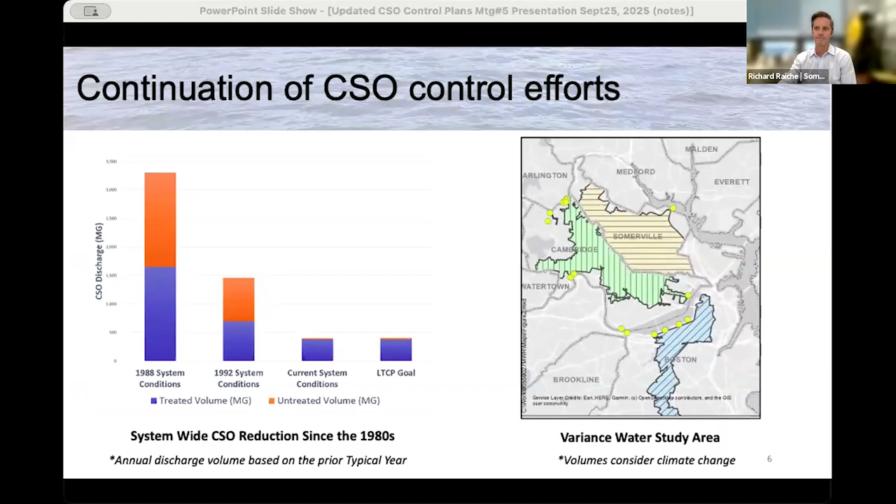For anyone who doesn't know what a CSO is: in most modern systems, there are two sets of pipes in the street, one for stormwater and one for sanitary, that are separate. In Cambridge, Somerville, and parts of Boston, and other municipalities outside the MWRA service zone like Haverhill and Fall River, we have an older system that is combined under dry weather conditions or small rainstorms. It works great because it sends all the sanitary flow plus some dirty stormwater to Deer Island for treatment. But when it rains heavily, like it does right now, that system gets overwhelmed, and there are relief points in the system that spill that combined sewage to the nearby waterways.

Now, that is as gross as it sounds, and certainly CSOs are a large source of pollution in those receiving water bodies, but they are not the only source. There's pollution that comes from dry weather, from inappropriate interconnections, from wildlife, and a lot of pollution from separated stormwater, including bacteria, oils and grease, and nutrients. It's important to understand there are a lot of negative impacts from all that pollution - water quality, environmental health, and primarily public health. But it's important to remember that eliminating the CSOs alone does not by itself result in swimmable and fishable water bodies. Those other sources of pollution are still a concern to the region.

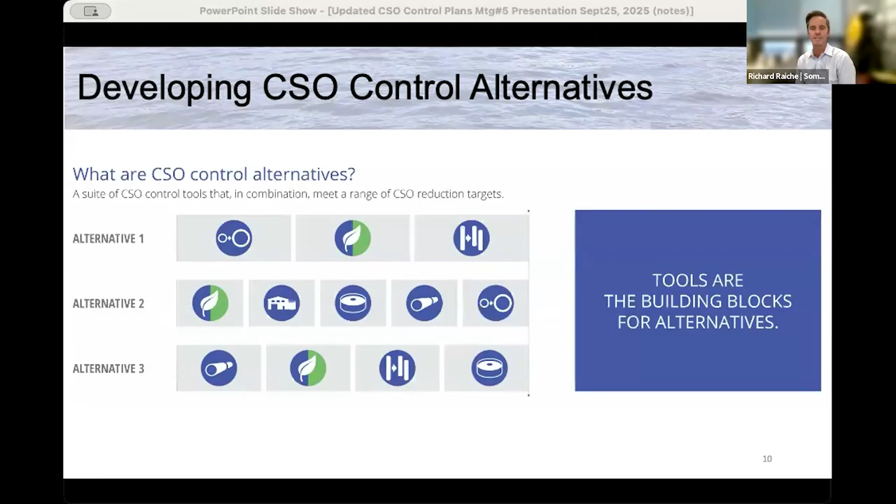Now, we take those tools and combine them. Certainly some alternatives for solving CSOs could entirely be one of those tools, but it's much more efficient to combine them. Each one has its own pluses and minuses in terms of effectiveness. So what the technical team has been doing for the past years and months is stitching those tools together in creative ways to create an alternative that is a holistic way of addressing the CSOs.

Next, we'll step into our process to select the alternatives. Later in the meeting, as Abby outlined, we're going to introduce you to those alternatives—there are 37 of them, so buckle up. But first, we're going to discuss our process for how to select a preferred alternative.

A preferred alternative is the one that will be selected by those project partners—the cities of Somerville and Cambridge, as well as MWRA—for advancement into the draft CSO long-term control plan. At the tail end of the presentation, we'll describe exactly what that is and what the future process is.

There will be one preferred alternative per receiving water body. So the Alewife, Charles, and Mystic will each have a preferred alternative, which is a combined set of tools, a suite of projects.

Now we're analyzing all of these alternatives against future conditions. The previous plan looked backward, and frankly, to our knowledge, every CSO plan in the nation has always looked backwards to evaluate those alternatives—looking through historical rainfall data and putting together what is known as a typical year that has a range of storms, a number of storms, a total amount of precipitation, storms of different sizes that reflect what typically happens.

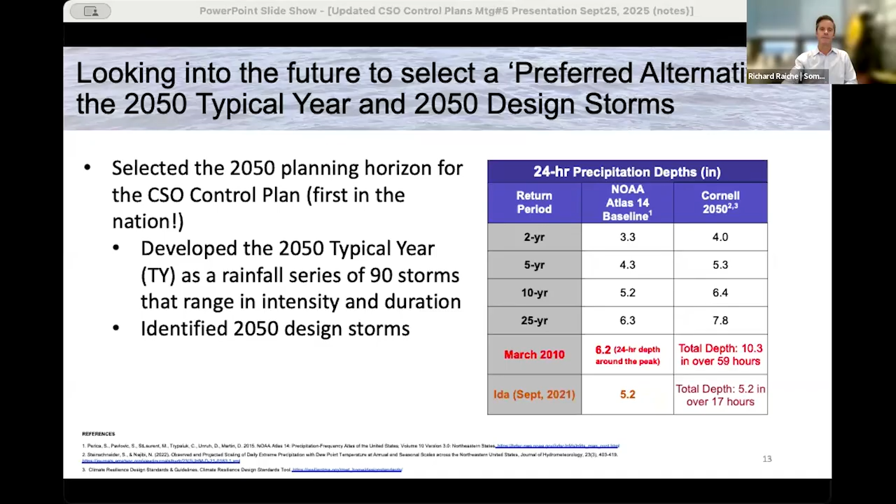We're also evaluating it for larger storms that happen less frequently but with higher intensity. You can see in the table here just how large those storms can get, and also some storms that people remember, just to give you context for what type of storms we're evaluating. So it's good to think about those storms in that context.

On the next slide, this is a result from our hydraulic model. Our hydraulic model is the tool we use to analyze both current system performance and alternatives. All these red dots you see are manholes in our hydraulic model where, essentially, the hydraulic grade line comes up to the surface or very close to it, under a 25-year storm. And when I say a 25-year storm, that's a storm that statistically happens once every 25 years, or in any given year has a 4% chance of actually occurring.

All of these nodes are essentially a system in failure. These are very large storms that cause a lot of problems. Clearly, there are CSO events in the future, but also really difficult storms for our operations people to manage—this is sanitary overflows into the street and backups into people's houses anywhere you see those red dots.

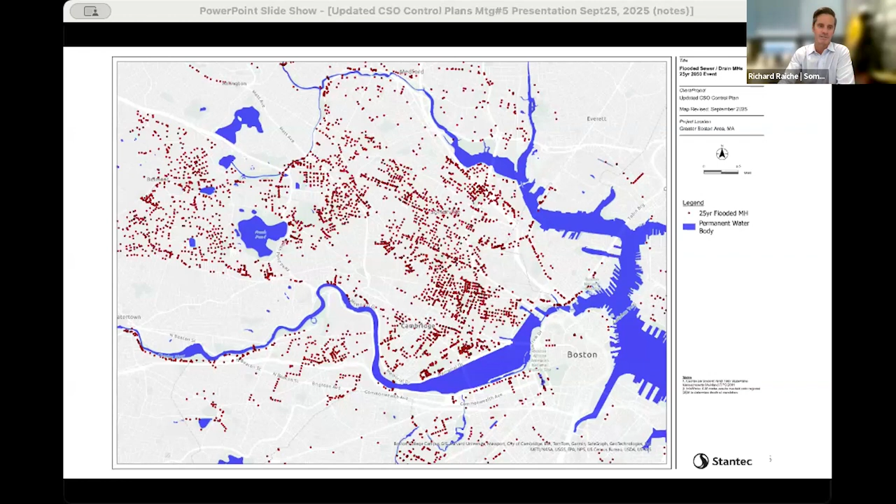Flipping back to the base map, just to orient yourself again—in addition to that system capacity problem where we have sanitary sewer overflows in the streets and in people's houses, we also obviously have localized street flooding. Under dry weather conditions we have none, but flip to the next slide and you can see just how much street flooding we have.

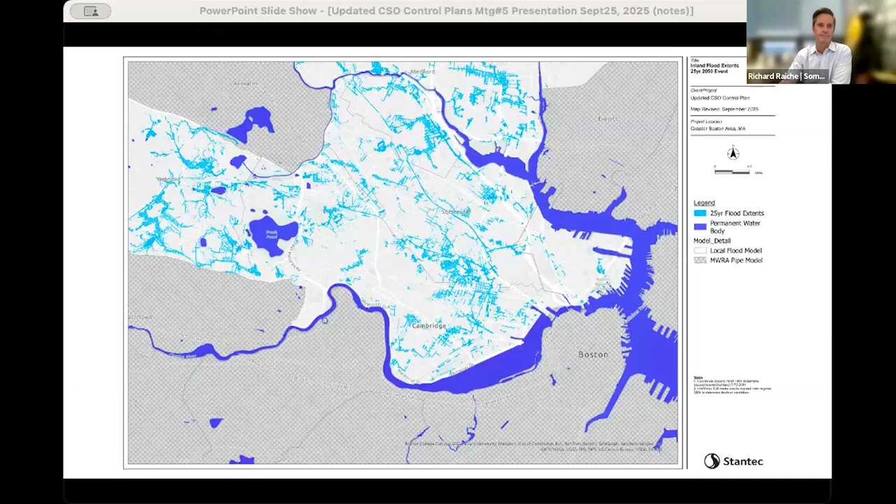And again, what we're able to use here are the hydraulic models of Cambridge, Somerville, and Medford. The grayed out areas we just don't have information on, but they certainly also have street flooding. This gives you an impression of, under that large 25-year storm, just how much street flooding we'll also be dealing with. And then one final flip back to the base map, just to see normal conditions.

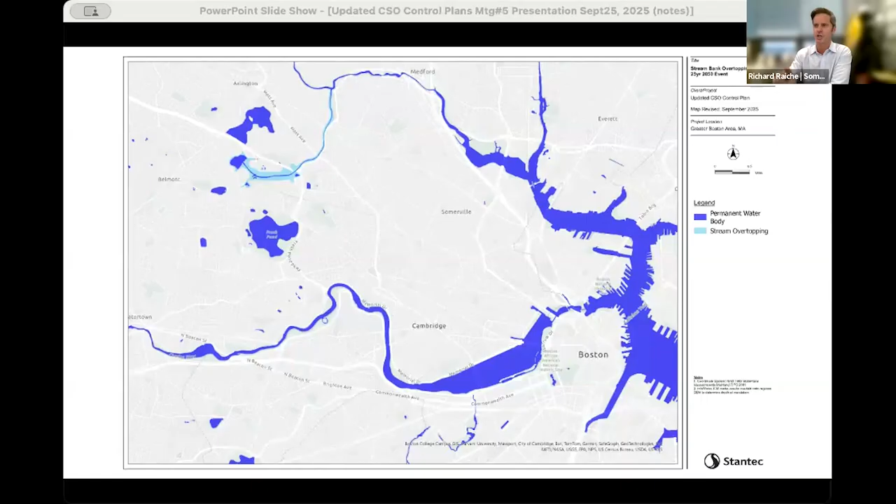And then looking at the streams themselves, a different hydraulic model shows us bank overtopping. On this one, you can see in the lighter blue, particularly around the Alewife, how much basically river flooding we have, bank overtopping. If we can just toggle back and forth for a second so that blue pops out a little more... or we'll move on. There you go, sorry about that.

We should have had the flashing lights warning at the top of this broadcast. So that's just to give you a flavor that those large rainstorms do a lot in our urban environment. Certainly Cambridge and Somerville and Boston aren't alone - everywhere faces these kinds of challenges when we have storms of that magnitude. But I just wanted to put in perspective what happens on our civil systems under that rain event.

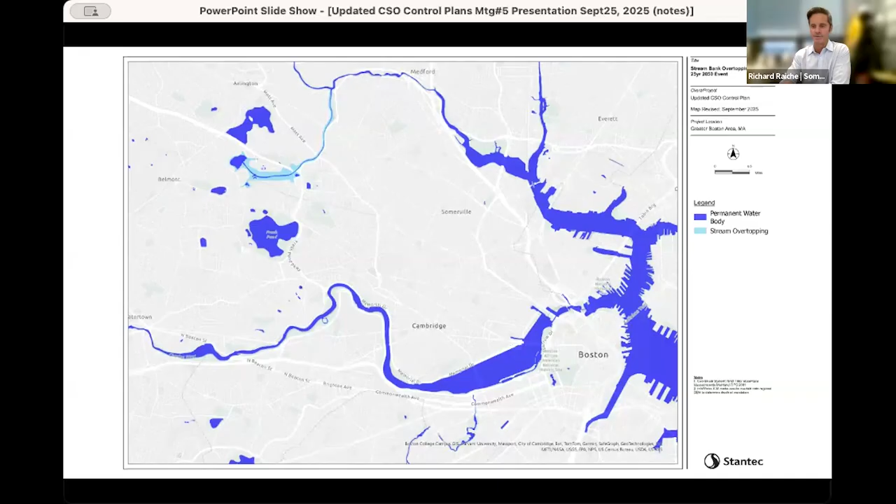So now we'll move into our preferred alternative selection considerations. We've had a couple of community meetings, a couple of workshops, and we've identified a number of considerations for criteria, and we'll step through some of these. The first is the level of CSO control, and I'll turn it over to Brian from the MWRA to describe what level of control is.

Thanks, Rich. So, I'm Brian Kubaska, chief engineer at the MWRA. I also wanted to point out that several of MWRA's senior leadership team is here tonight. They wanted to make sure they heard comments, heard all the information, and are very engaged in this important process we're going through here. If you jump to the next slide.

So we've developed what we're calling 4 levels of control, which are being evaluated as part of this process. Using our detailed hydraulic computer model of the wastewater collection system, which includes all the sanitary pipes of Cambridge and Somerville, and the pump stations and pipes of the MWRA, we're able to predict the number of activations and total volume of CSO that we'd expect in these 2050 storms that Rich mentioned earlier.

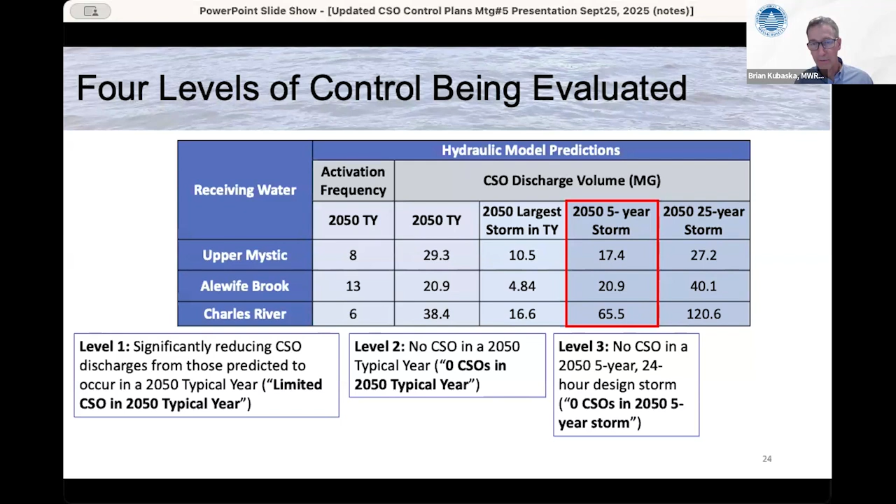The red boxed volumes are what is required to be captured. So for example, 65.5 million gallons in the Charles captured to achieve that level of control, a 5-year level of control. And lastly, the greatest level of control evaluated would result in no CSOs in a 2050 25-year design storm.

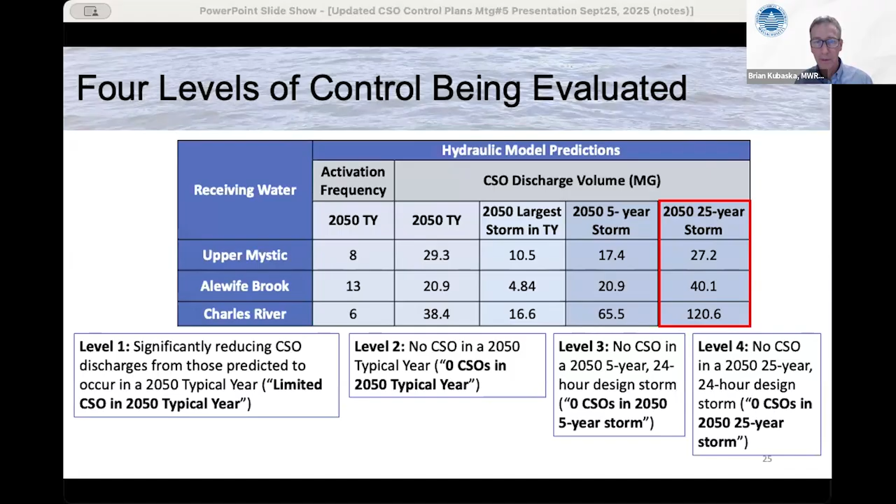This infrequent event, as Rich mentioned, has a 4% chance of happening out in that 2050 planning horizon. Very large CSO volume to capture, resulting in very large and complex projects. In comparison with the largest storm in the typical year, that light blue column that I mentioned in the center, the Alewife and Charles are predicted to have like 7 to 8 times greater CSO volume to contend with. So a lot more volume to deal with in these very large storms.

So I'll turn it back over to Rich to talk about some additional considerations in our alternative selection.

Another one to think about is the timeline to implementation to get to CSO benefits. Again, these alternatives are stitching together large numbers of projects, large numbers of complex projects. And some of the alternatives get to CSO reduction faster than others.

So that's a consideration. The impact on priority vulnerable and environmental justice populations. This is a state requirement, acknowledging particularly that prior actions in the state sort of ignored the populations without agency, and that it is incumbent upon all of us to consider that in these types of planning endeavors.

Then there's permitting uncertainty and site acquisition risks. We didn't take any alternatives off the table because we thought that they were going to be difficult to do, either difficult to permit, in terms of new outfalls to the rivers, in terms of doing work in DCR land, crossing mass highway rights of way. We didn't eliminate anything, but we did want to identify that some projects have more uncertainty or risk than others. So that would become a criteria by which we evaluate them.

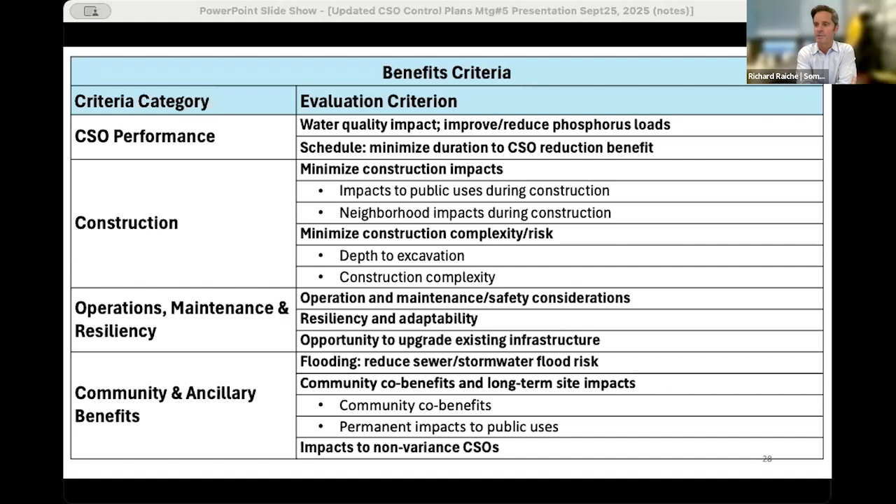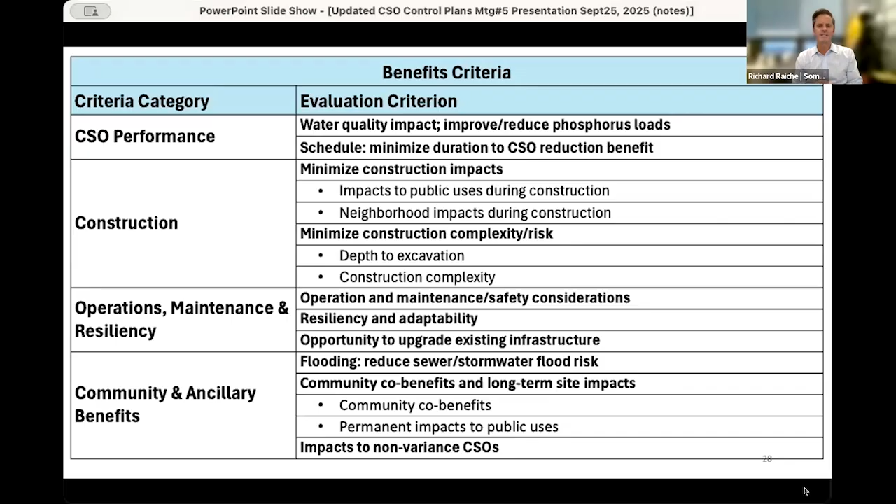And then finally, community and ancillary benefits: reducing flooding, co-benefits particularly from green stormwater infrastructure, permanent impacts to public uses, and one final one is the impacts from non-variance water CSOs. So we've got a range of these. A lot of these are more technical ones that we can evaluate. And then finally, stakeholder impact.

And for that, I will hand it back over to Abby to reflect back what we've been hearing from all of you interested stakeholders who have been attending these meetings and working with us in workshops.

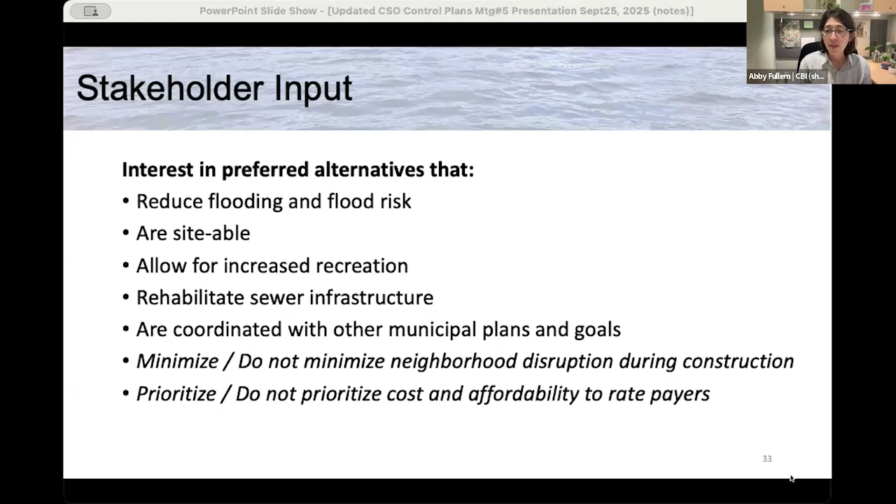So there's a lot of input that we've gotten from the public, from other city councils, boards, advisory boards, and organizations, and we really appreciate all of that. This is one of the considerations that the project team is using to select the preferred alternatives.

Now we want to share these 37 preferred alternatives with you. Lucica Hiller from the city of Cambridge is going to do a little orientation on how we're going to talk about these, and then she's going to jump right in. Thank you, everyone, and welcome. My name is Lucica Hiller.

I'm the Senior Project Manager for the CSO Control Program with the City of Cambridge. I'm joined today by Jim Wilcox, the City Engineer, and Diane Stokes, the Director of Engineering Services. Like Abby said, we took all this feedback, and using our unified computer model and future precipitation data, we modeled hundreds of scenarios to understand what is possible in terms of reducing and eliminating CSOs, which tools work better and where, and what is possible to engineer and build.

While we did that, we came to some key technical decisions. Through our modeling, we found that full sewer separation will not eliminate sewage going into the rivers, and we will still have sanitary sewer overflows in some areas during large storm events. You saw the map that Rich shared with the red dots.

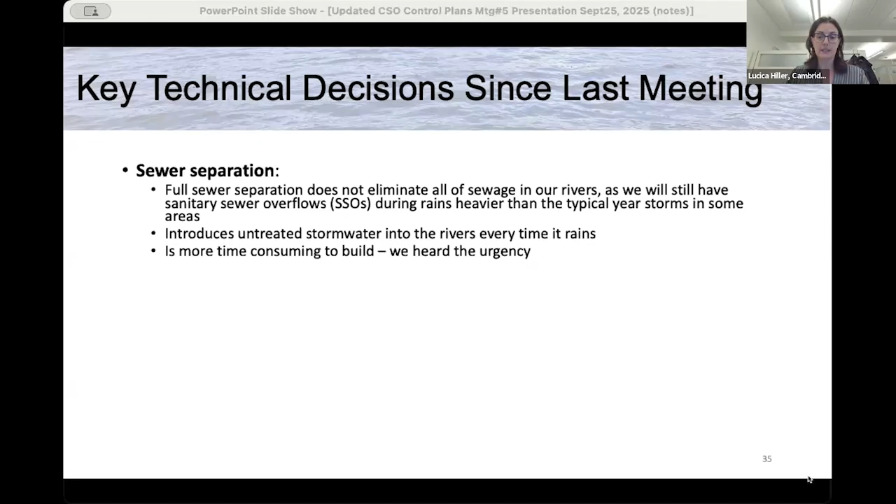Additionally, with sewer separation, we're introducing more stormwater. That is a problem both in terms of the pollutants in the stormwater, but also the quantity we will be introducing into small brooks such as the Alewife. Sewer separation is also time-consuming, so we've heard the urgency to build faster. For all these reasons, you will see that we are including sewer separation in some of our alternatives, but not as extensive as full sewer separation.

CSO treatment is another tool we have, but that just reduces and eliminates the bacteria from a CSO discharge, not the actual CSO discharge volume. So this was removed as a viable option for this plan because treatment requires both an underground storage tank and an above-ground large building—think something like Cottage Farm or the Somerville Marginal Facility, where chemicals such as chlorine are stored and used. Storage tanks, like combined sewer overflow storage tanks without treatment, can help us reduce CSO volumes without the need for trucking, chemicals, and additional buildings for our O&M needs.

Green stormwater infrastructure is not an effective tool for CSO control, as it cannot by itself capture the immense amount of stormwater we need to see CSO reduction for these future climate conditions.

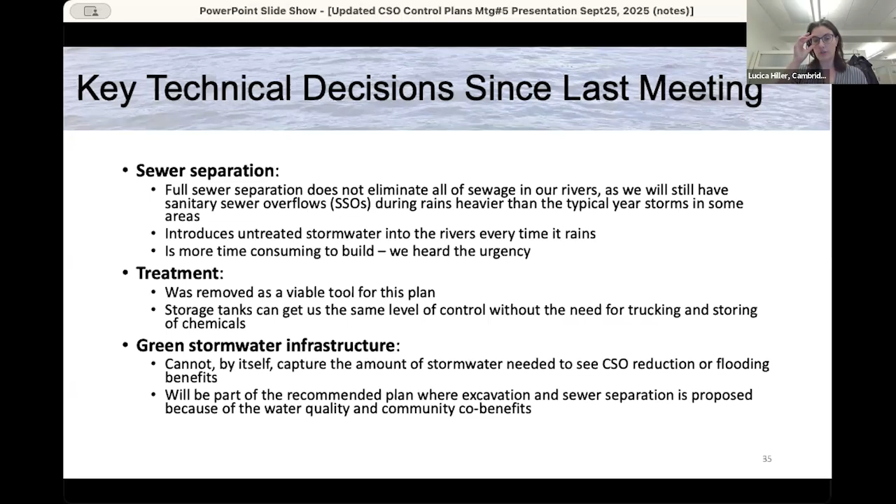Our alternatives include GSI more at a regional scale to see if that has an impact in helping us with the gray infrastructure needs. We want to reiterate our commitment to include GSI for projects that include excavation or sewer separation, because we know the co-benefits for the community and how important stormwater treatment is.

Okay, with that in mind, somebody already mentioned we came up with 37 alternatives that we are considering for the draft report plan. They span the 4 different levels of CSO control that Brian mentioned, and our 3 water bodies. They range from limited CSOs in the 2050 typical year to no CSOs in that large future 25-year storm.

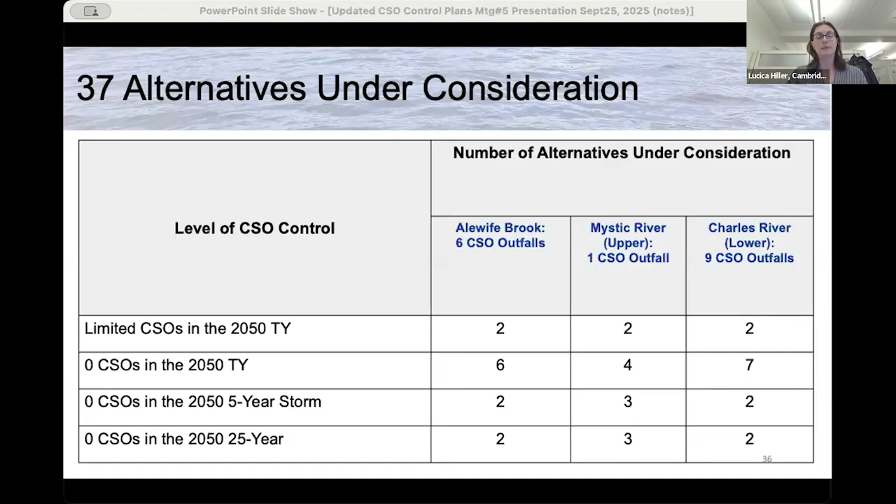In the next slides, we will go into some detail about the 37 alternatives. We will go pretty fast and highlight major components and differences between them. This information and additional details for the sub-projects is actually available right now on our joint website. I'm going to ask Abby or Charlotte to put it again in the chat. We hope that you will go there and look through more. This is what you will see in the draft report, and we will present additional detail and information there.

Okay, we'll start with the 12 alternatives that we've developed for the Alewife Brook. This is a summary table that shows the 12 alternatives. They're arranged by level of control in each column, with a naming convention—for example, 1AB, 2AB, 11AB, AB standing for Alewife Brook. You will see for the Mystic and the Charles, a different letter combination.

In the first column, for 0 CSOs in the 2050 typical year, we looked at projects for each outfall. So you'll see groupings of smaller projects and a variety of approaches, going from storage—like tanks and tunnels—and then also separation and micro tunnels. These all make up these alternatives.

For some of these projects, we found that having limited CSOs—the second column—at certain outfalls may greatly benefit the implementation burden, the cost, and timeline for these projects. Then when we go to these larger storms, the 5-year and the 25-year storms, the third and fourth columns, we found out that we need regional approaches for that much water. These levels of control are focused on storage, as we have stated in past meetings.

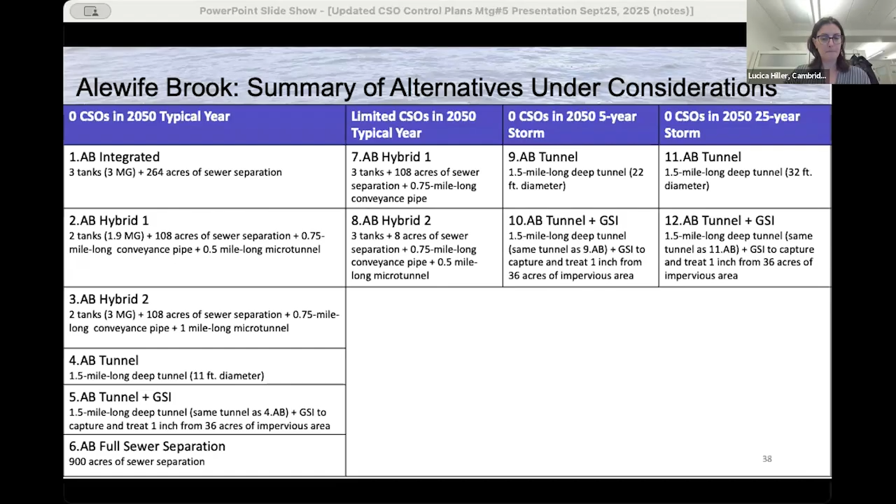Okay, so to orient people, all our alternative slides will look like this. They're very similar. What you see here is a map of the tributary area in the Alewife Brook, and in the purple triangles, you see where the CSO outfalls are, or regulators. The purple diamond rhombus at the top of this screen represents the Alewife Brook pump station, but in other project sheets, they represent relevant facilities in our region.

For this project, Project 1 AB integrated, we are proposing 3 combined sewer overflow tanks shown here in these yellow dots, about 264 acres of sewer separation shown in this blue polygon, and a large storm drain shown here in that blue line along Mass Ave. This project will require land acquisition somewhere in the blue polygon to slow down stormwater before it can be released into the Alewife Brook. GSI is not explicitly shown here or in any of these alternative sheets, but it is included as part of sewer separation and other excavation work.

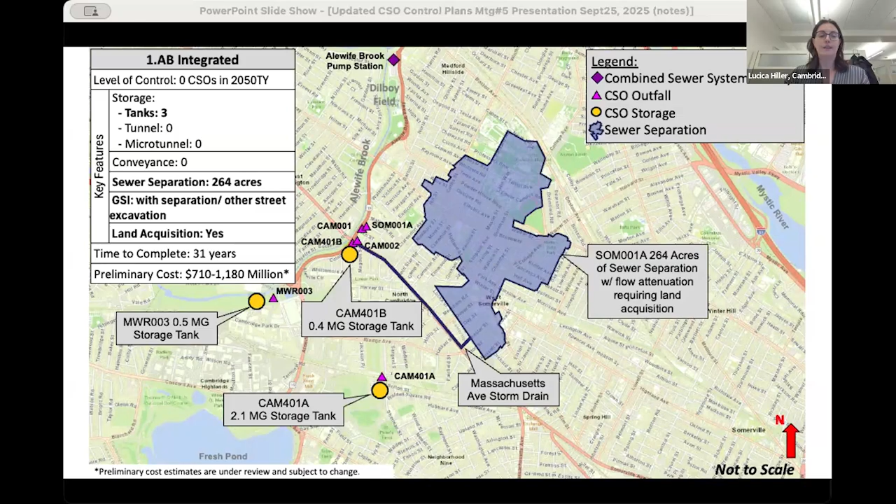The second alternative is a hybrid of the first. This one changes a little bit. We could get to the same level of CSO control, 0 CSOs in the 2050 typical year, but we could do it faster, in 20 years, and also cheaper, for $350 to $580 million, by doing 2 CSO tanks, less sewer separation, about 100 acres, and including a half-mile long micro tunnel shown here in this green line.

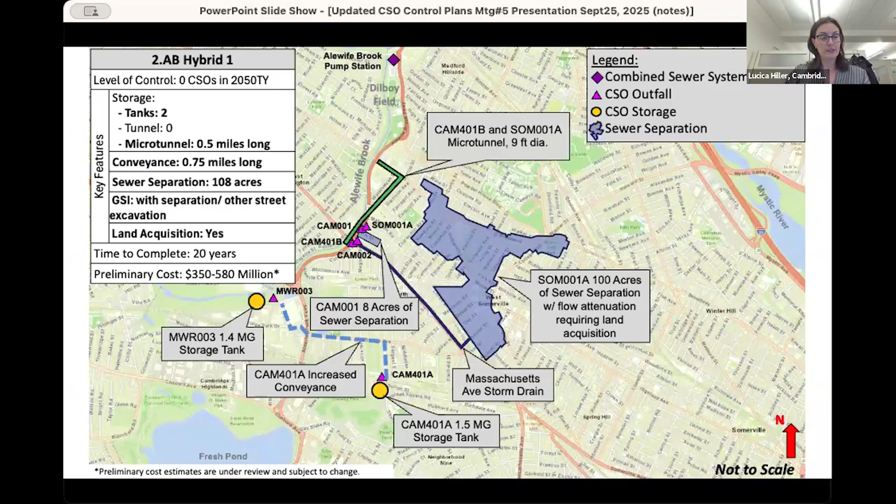The third alternative for the Alewife Brook makes additional improvements in terms of timeline to get to the same level of CSO control. We estimate about 15 years. It's cheaper again, somewhere between 200 and 340 million, and still has 2 large CSO tanks, but it has very little sewer separation and instead a 1-mile long micro tunnel.

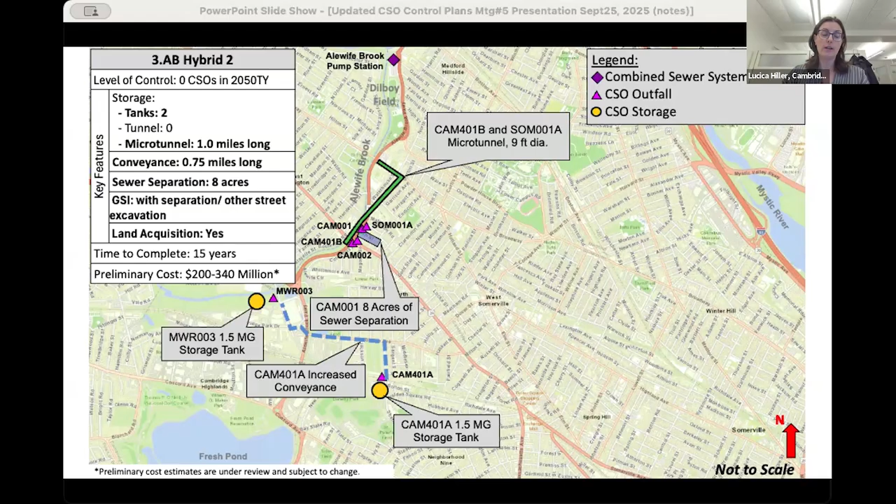Alternative 4 is a regional approach that includes a 1.5 mile tunnel, 11-foot diameter. Imagine two people standing over each other - this is how big this tunnel will be. This will take about 15-20 years to complete and cost between $440 and $740 million. There's also additional pipes that will need to be increased, seen here in this dashed blue line, and the tunnel alignment is shown here in red, and the small orange dots represent the tunnel drop shafts.

Alternative 5 is the exact same as alternative 4 with the tunnel, but includes GSI here, and you can see the inclusion of large-scale GSI. The tunnel size doesn't change - we still need just as big of a tunnel to get there.

Alternative 6 is what we looked at for sewer separation in this area. To get to 0 CSOs in the 2050 typical year, Cambridge and Somerville will need to separate about 900 acres. We estimate this to take more than 50 years and cost somewhere between $1 or $2 billion, as we need to consider significant land acquisition for storage, treating, and stormwater.

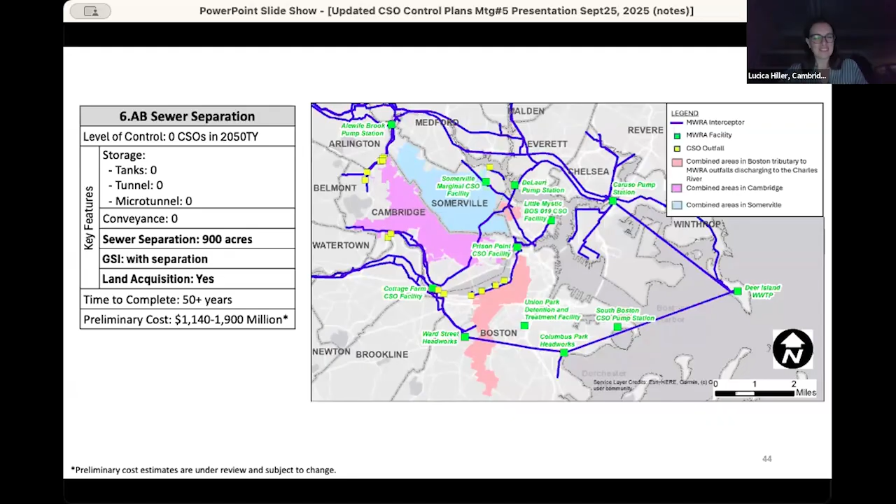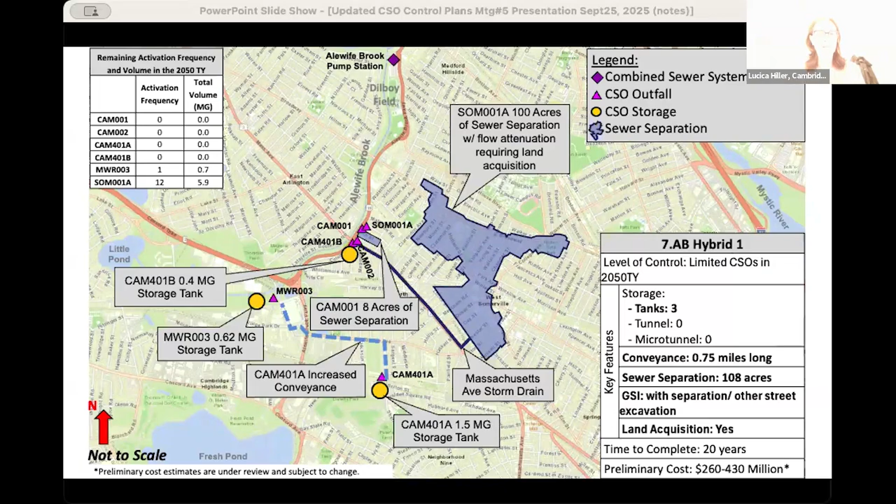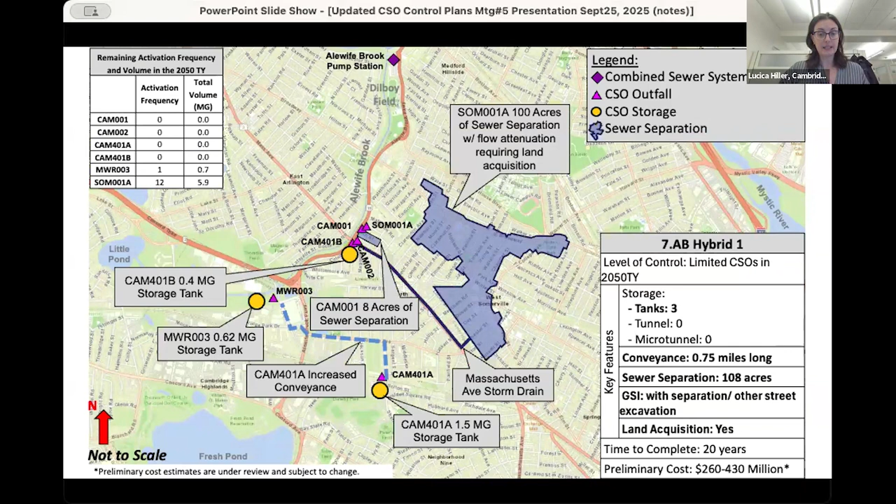This is still going to take 20 years, and you see the cost here.

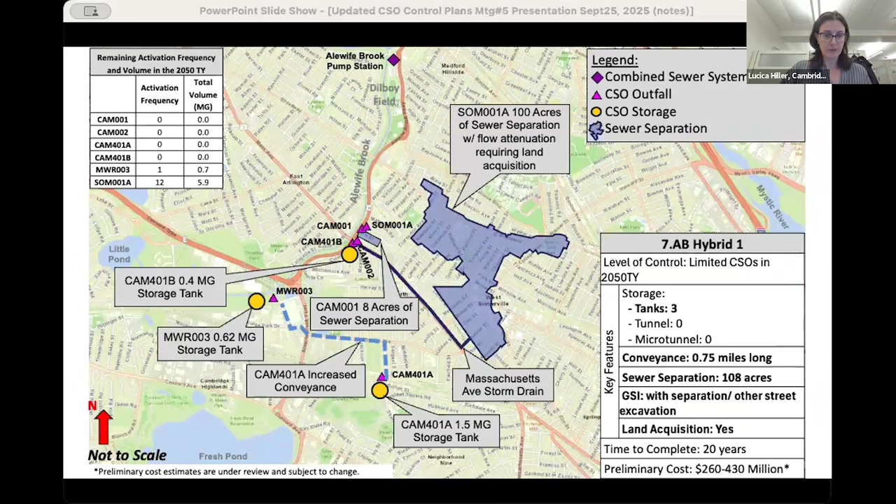Alternative 8 is a hybrid of what I showed you previously, and this one includes a 0.5 mile long microtunnel instead of Somerville sewer separation. This can get us down to 4 activations and 3.8 million gallons of discharge in the 2050 typical year for about $200 million, and it will take somewhere between 10 and 20 years.

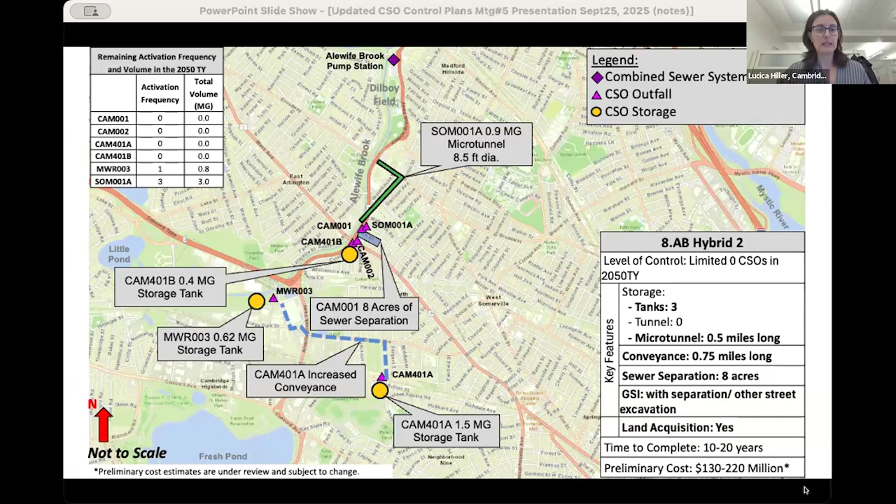Okay, alternative 9. Now we're going into the large, 5-year storm level of control. To get to that level of control, 0 CSOs in the 2050 typical year, we are proposing a large diameter tunnel. It's similarly long, 1.5 miles, but it's a 22-foot diameter as opposed to the 11-foot diameter - about 3.5 people. For this tunnel, we will also need an odor control facility and a dewatering pump station. This will take about 12 to 15 years and cost about $1 billion.

Moving on, alternative 10. This is the same tunnel as before, but includes GSI, and as you can see, the size of the tunnel stays the same. So GSI definitely has co-benefits, but it's not helping us reduce the size of our tunnels.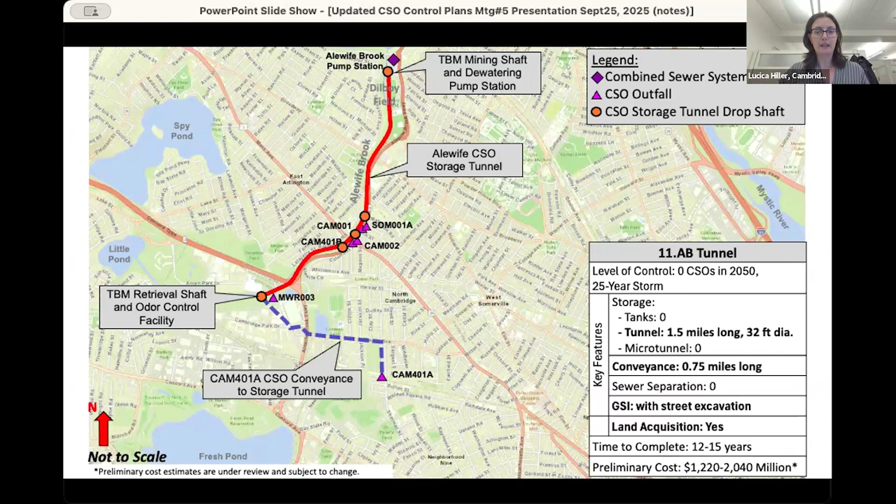Alternative 10 is the tunnel proposed for the largest level of control we're considering, with 0 CSOs in the 25-year storm. That's Alternative 11, right? Just want to make sure we're on the same page. Yes, 11, thank you.

Alternative 11 has a 1.5 mile long tunnel, and you can see the diameter is 10 foot larger, or thicker, than before. We estimate the same construction duration as for the 5-year storm tunnel, but the cost here almost doubles.

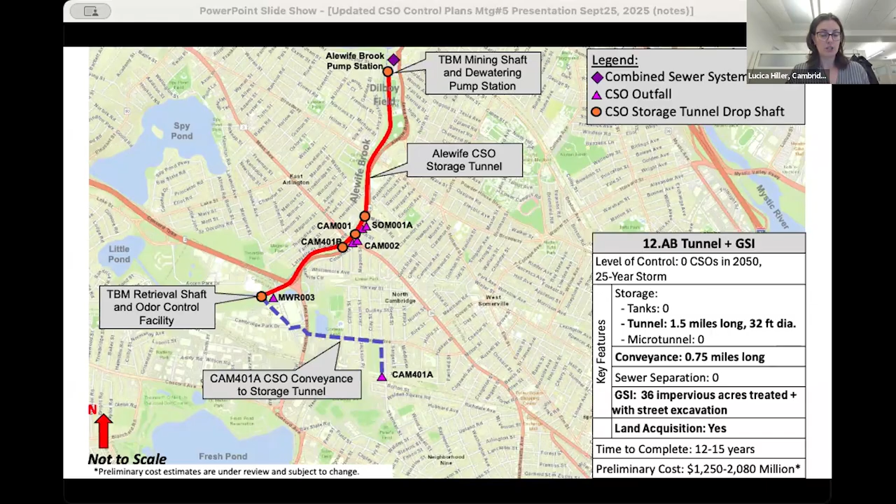Lastly, the last alternative we're considering for the Alewife Brook is the large tunnel and GSI for the 25-year level of control. You can see the costs and implementation time are similar, and the tunnel needs to be just as large.

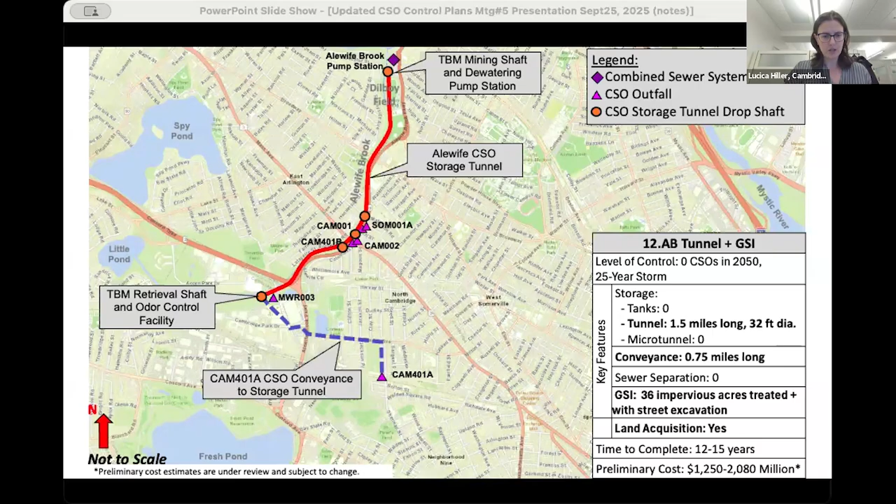I'm going really fast through these, so please ask us questions as we move into the Q&A session. I'm going to pass it on to Rich to talk about the other alternatives in the Mystic River.

Thanks, Lucica. We look over at the Mystic. The approach is the same as in the Alewife, so we've got alternatives for the different levels of control, each one an elaboration on the previous ones as we step through the numerical alternatives. We can jump right in.

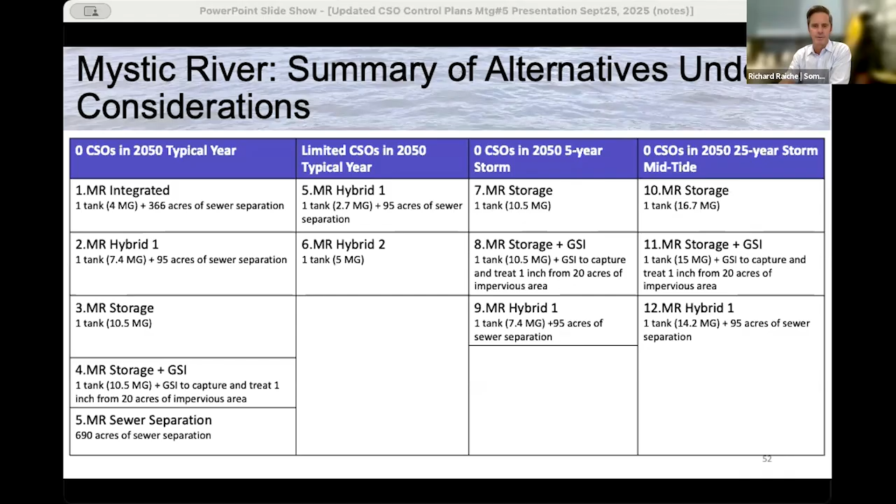The approach is the same as what Lucica outlined, so I might go a little faster. For the typical year we analyzed, the starting point was a good deal of sewer separation in the Winter Hill area, plus a storage tank for CSO flows down in the Assembly area. We're targeting the parking lot area in front of Staples at the moment, which will be a development parcel for Assembly, but that's the current target.

On these slides, while we're counting this as a one-tank alternative, that's because it's one CSO combined flow tank directly reducing CSO flow. The sewer separation in Winter Hill does require construction of in-system stormwater storage tanks. We have limitations on how big we can build those new stormwater pipes in already congested, narrow roads, so there's a hydraulic capacity issue with sewer separation. To avoid extensive flooding on day one, the first time the new stormwater system sees a decent-sized rainfall, we have to have tanks in the system.

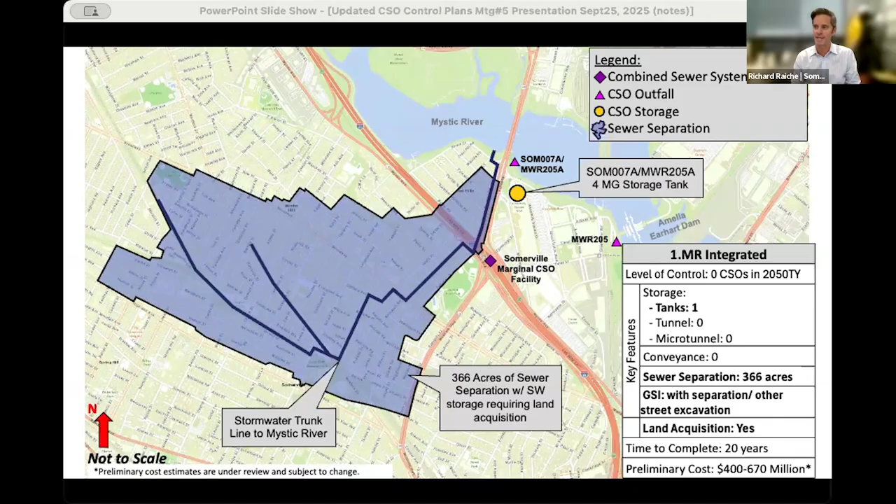Moving on to the second, a hybrid alternative: we refined it, reduced the area of sewer separation but increased the size of the tank down in Assembly Square. That also gets us away from needing a tank in Gilman Square, so you can see where the technical team is going with this. You also see a lower price tag and a faster timeline to elimination for that same level of control.

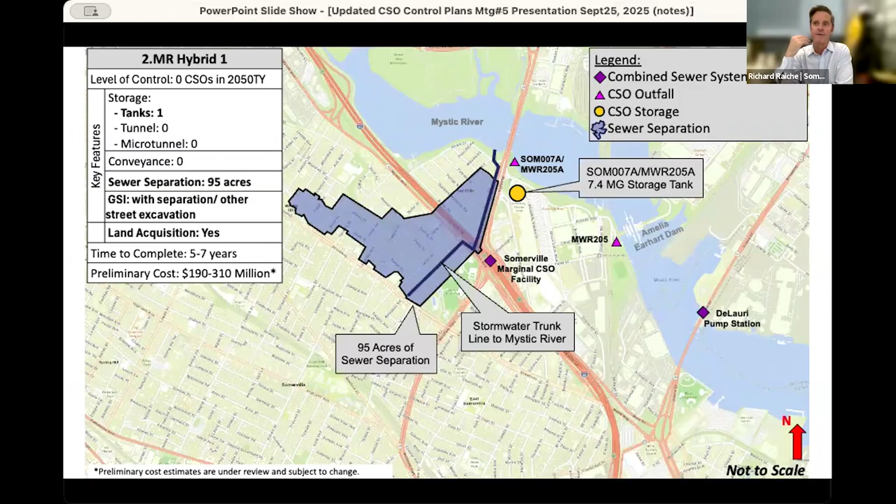Moving on, an additional alternative for the typical year asks: what if we did no sewer separation at all and just built a very big tank? Now we're into a 10.5 million gallon tank, which frankly probably isn't technically feasible, but we wanted to leave it on the table, since as I said earlier in the evaluation criteria, we didn't want to take things off the table — we wanted to evaluate them. The price tag and timeline are slightly different from the hybrid, but it has higher land acquisition risk.

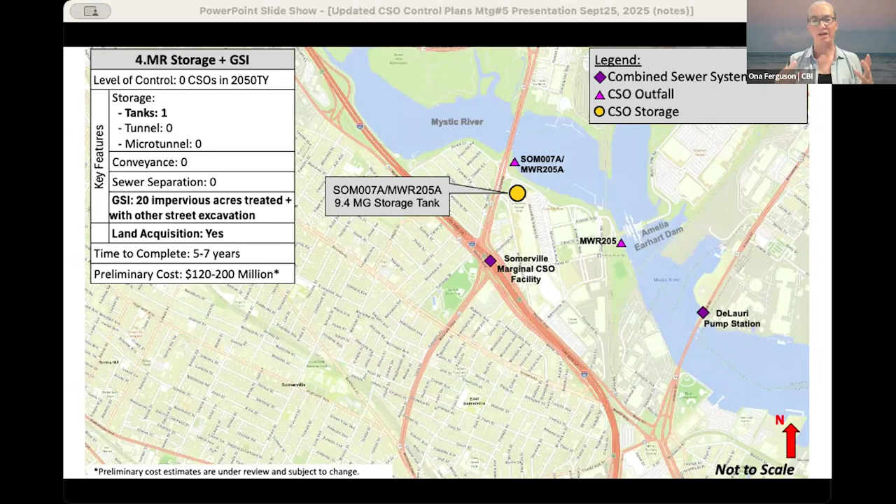Moving on, as Lucica alluded to with the tunnels, we said: what if we stayed with the idea of tank storage, but did extensive GSI in the upstream areas to reduce its size? The size of the tank goes down, and the cost associated with that tank goes down, but the overall implementation cost goes up because we're doing a lot more GSI. This one is Alternative 4, for those trying to match.

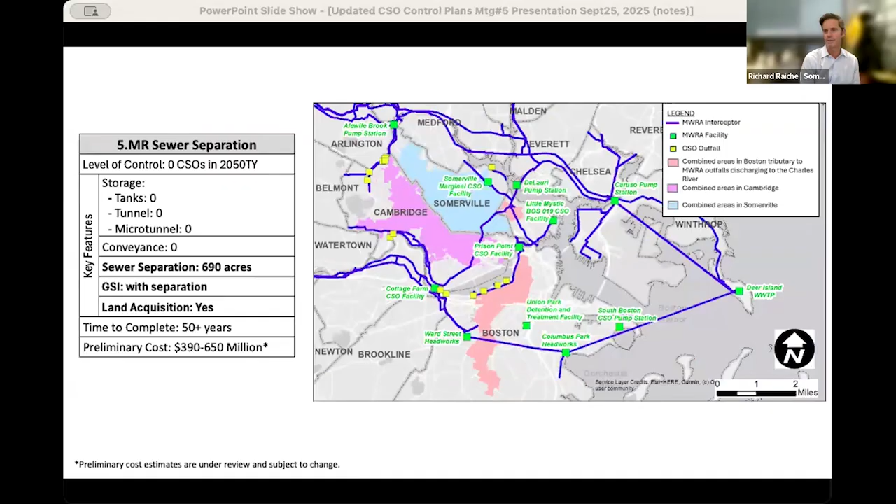So in the 5th, again, this is essentially the same alternative that Uchika put up. This is the total sewer separation for all the combined areas. It's a large area. It's a long timeline to implement.

I do want to highlight again that sewer separation does not get us to 0 CSOs or 0 sanitary discharge into the riverways for storms larger than the typical year. That might be a little difficult to get your head around, but it is essentially impossible to keep all stormwater out of a sanitary system. So even the separated areas like Belmont, Arlington, Medford, Watertown, stormwater makes its way into the sanitary system, particularly in those large flows. And so even the sanitary system gets overwhelmed on that, which causes those other types of overflows in the large storms.

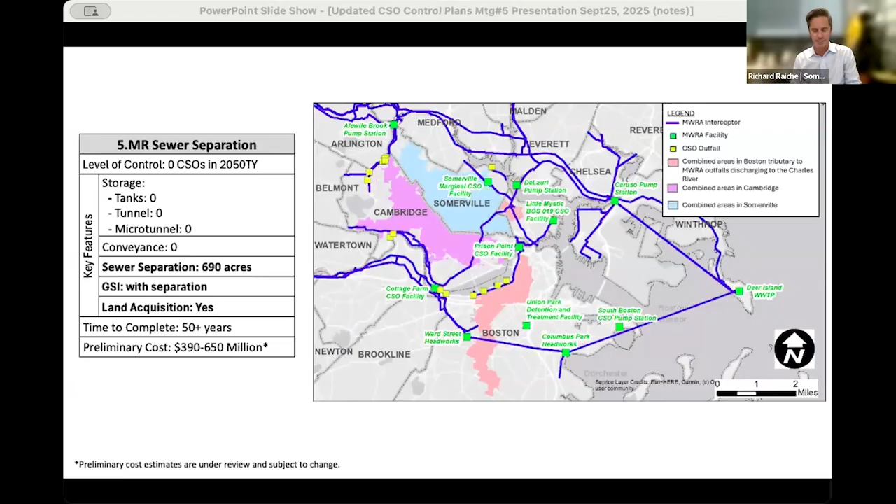And I will also highlight, you will have noticed that there is an asterisk at the bottom of all of these. All of these costs are preliminary and under review. The technical team is trying to move this work as quickly as possible to hit our deadline of submitting the draft report at the end of this year. But we also want to have these public meetings and show our work as we're going. So a lot of this is still work in progress, particularly at this point the cost numbers are changing. The areas, the acres of sewer separation and the size of the tank, those numbers are fairly well locked down, possibly entirely locked down, but we're still working on the costs.

So I did want to highlight that before moving on. Okay, moving to the next level of control, the less than typical year. The analysis here was to see if we were to scale back some of those lower cost alternatives for the typical year, if we were to scale them back a little bit more and see if there was sort of a break point, knee of the curve on the cost per gallon. And so these less than typical year ones sort of do that.

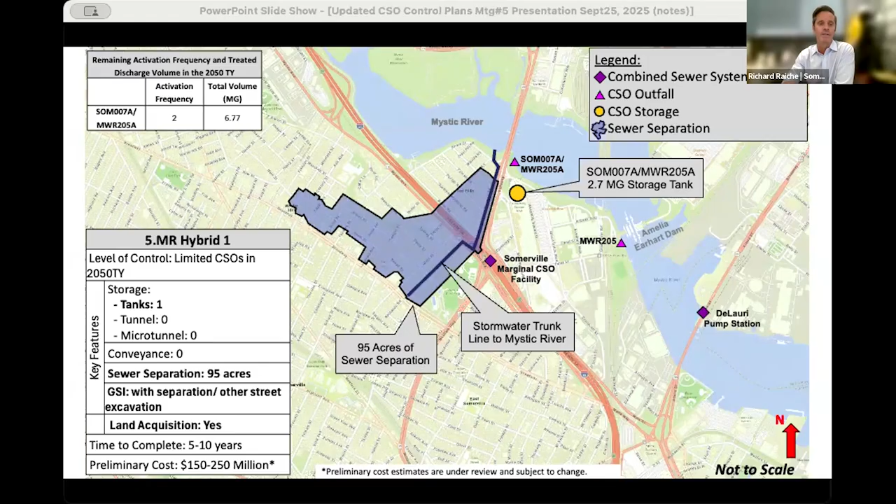The less than typical year option number 5, MR hybrid 1, is really an outgrowth of the typical year hybrid 1 that scales back. It keeps the same sewer separation area, but reduces the size of the tank. And for this, what would result is instead of 0 events and 0 gallons, it would be an activation twice in that typical year with a spill of about 6.8 million gallons. And you compare that to what our baseline is. Again, these are 2050 projections. But if we were to do nothing, we would expect 8 activations and almost 30 million gallons. So just to compare, what this alternative gets you.

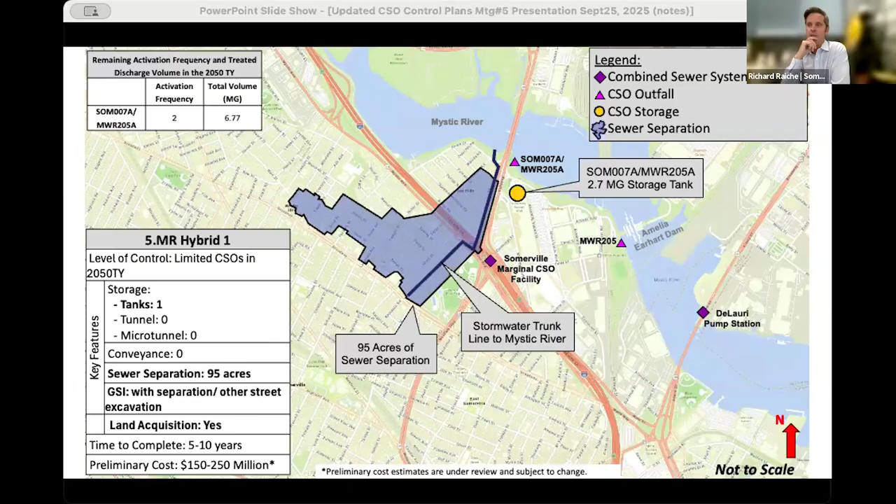Moving on to number 6. This is the same thought process as the other hybrid 2, a tank only, and you see that cuts that tank size from about 10 million gallons to 5 million gallons, and again it reduces the CSOs, from 8 in a typical year and 30 million gallons down to 2 in a typical year and about 8 million gallons.

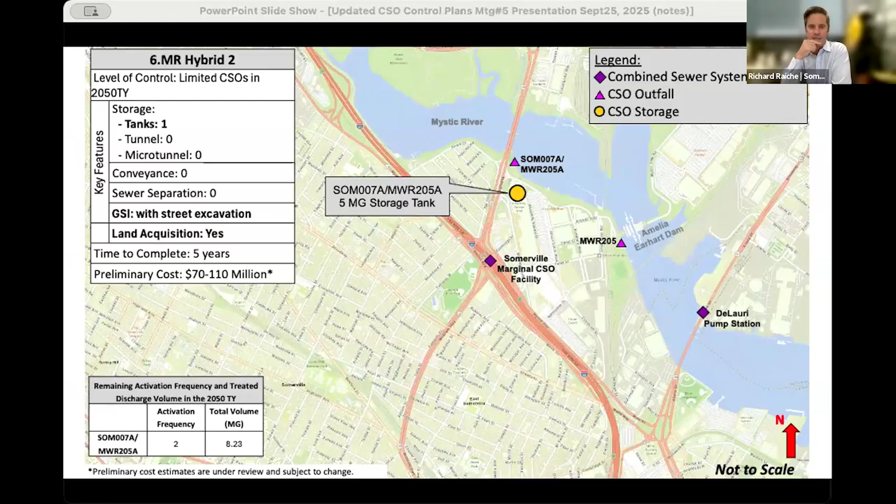Moving on... what am I looking at? 7? Yes. I guess this jumps back - let's go on to the next one.

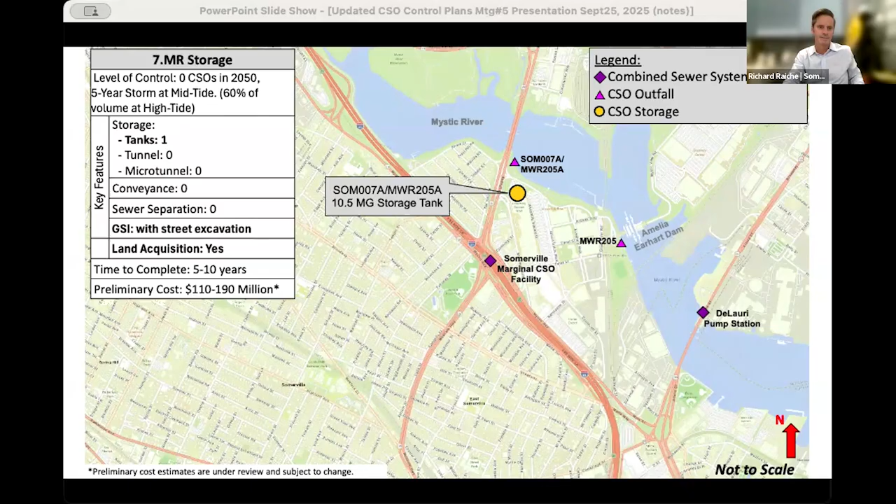Okay, going in the opposite direction, trying to get to that 5-year level of control. For this, we've got to go to storage, because again, when you get to the 5-year level of control, the sewer separation isn't effective anyway. So this is a storage tank, a deep storage tank. Although we did look at, on alternative number 9 on the next slide, putting that sewer separation back in, but also having the tank to get you to that 5-year level of control. Again, if you compare this to typical year hybrid 1, that's simply a larger tank to account for the fact that we do have more discharge.

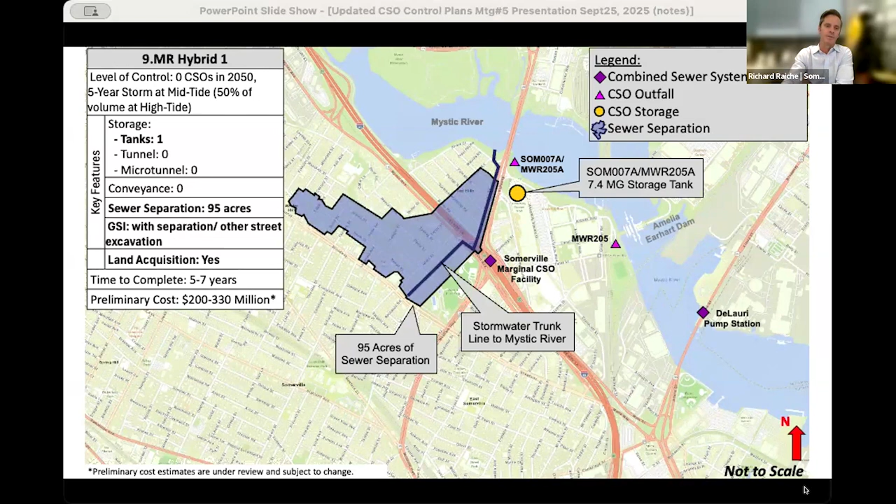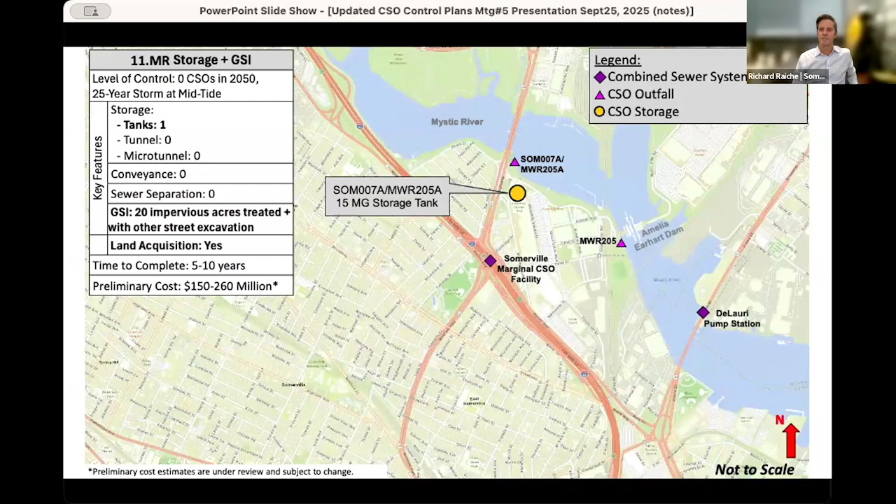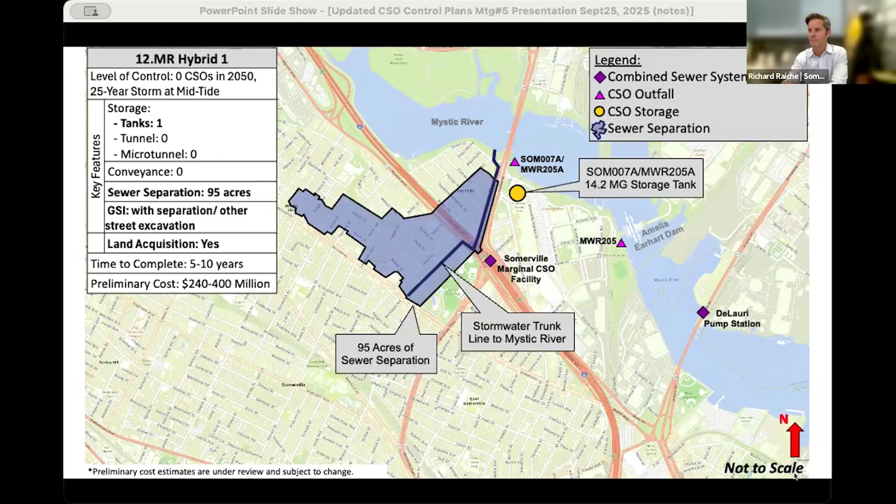So I hope that made some sense. Obviously there's a lot to digest here. I imagine people with interest in the area can download the deck from the website that Charlotte put in there, and we're happy to answer questions either today or at another opportunity. So now I'll turn it over to Brian to step through the same sort of rationale in the Charles River.

Yep, I think Jeremy is going to cover this one. So, Jeremy. Good evening, everybody. My name is Jeremy Hall. I'm a program manager at the MWRA. And tonight I'll be going over the 13 alternatives we are evaluating for the various levels of CSO control in the Charles River.

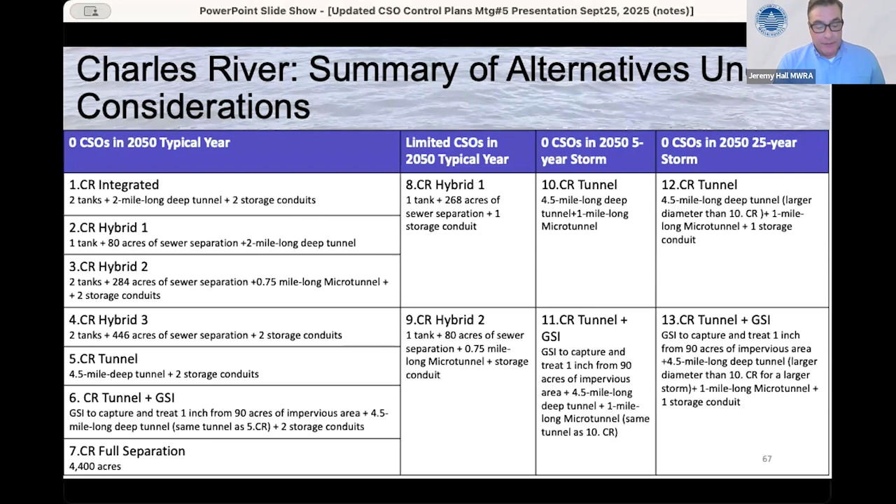As Luchika and Rich have already done, they've gone over how we're going to use this table. We're going to use tools to create alternatives. For the Charles River, we looked at applying CSO control tools at individual outfalls, so you will see groupings of these tools that make up the alternatives. For some alternatives, leaving a limited CSO discharge at certain outfalls may greatly reduce the implementation burden, cost, and timeline for these projects.

If you look at the middle column, those are the ones where we would have less than typical year results, and those would be alternatives 8 and 9. In the next column, we move up to the larger design storms, the 5 and 25 year, which require a regional approach for handling the massive volume of water associated with those storms.

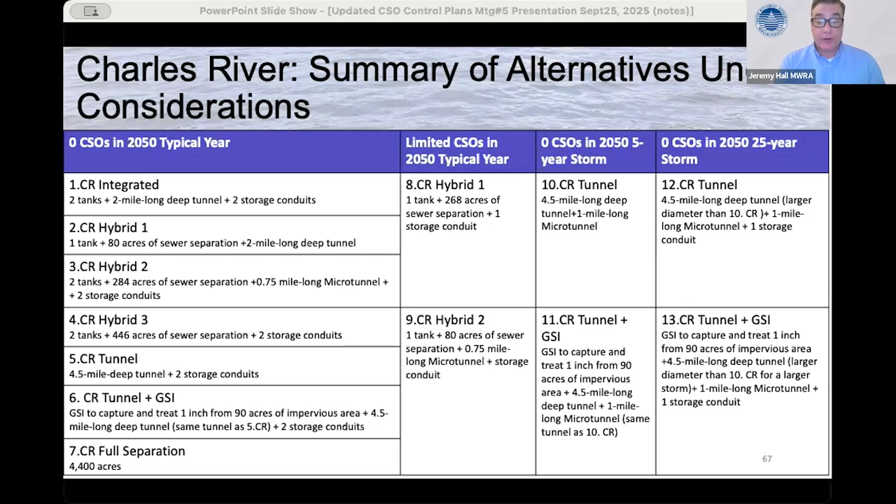So obviously with those large storms, we are focused on storage alternatives. GSI can be used in two ways: one, to reduce volume getting into the system, and two, for treating stormwater before going into a water body when a new stormwater discharge is created. Next slide.

Here's alternative 1 for the Charles River, the integrated alternative. This alternative utilizes the integrated approach where we've combined tanks, tunnels, and storage conduits into a single alternative. The key features include 4 storage tanks, scattered around - a 2.5 million gallon storage tank over at Cam 5, top left, a 0.6 million gallon tank at Cam 17, and 2 smaller tanks to capture the CSO tributary to MWRA 023.

This alternative also includes a 2-mile, 17-foot diameter tunnel providing storage for outfalls MWRA 201, MWRA 18, 19, and 20, which are in the middle along the Charles. This alternative is anticipated to take 15 years to construct and is estimated to cost between 770 million to 1.28 billion dollars.

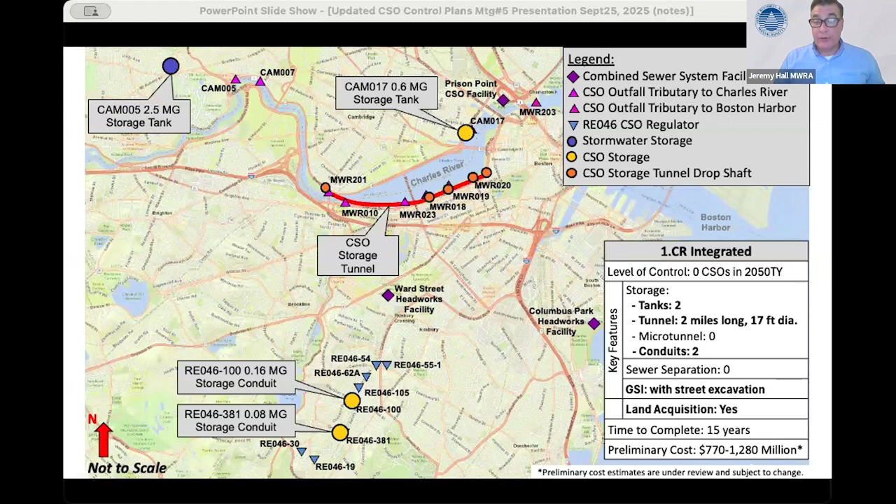Moving on to alternative number 2. This alternative is based on the first integrated alternative we saw. However, we've replaced the tank at Cam 17 with 80 acres of sewer separation, the blue area in the top middle of your screen. The time to complete for both integrated 1 and this hybrid number 1 are both about 15 years to construct.

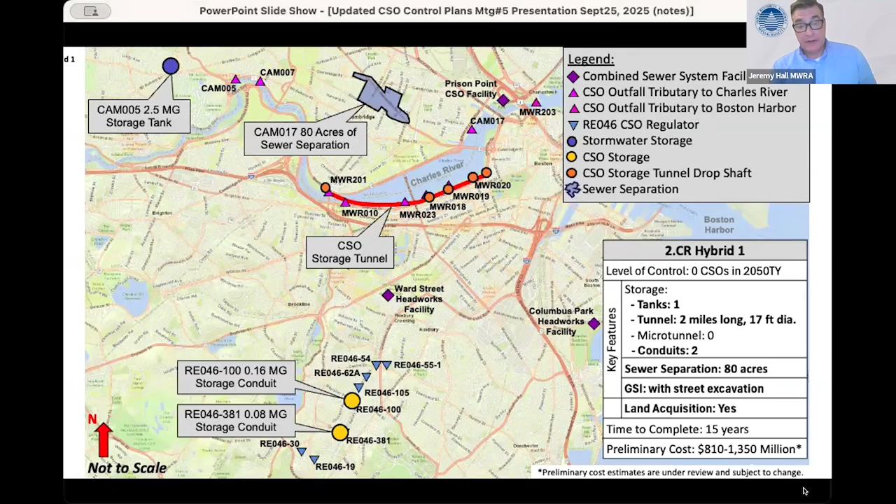Alternative 3, hybrid 2, builds upon hybrid 1 by replacing the storage tunnel with a 10.2 million gallon tank located at Magazine Beach in Cambridge. That tank is designed to capture treated CSO from Cottage Farm, and the 204 acres of partial sewer separation in the back bay, that other blue dot.

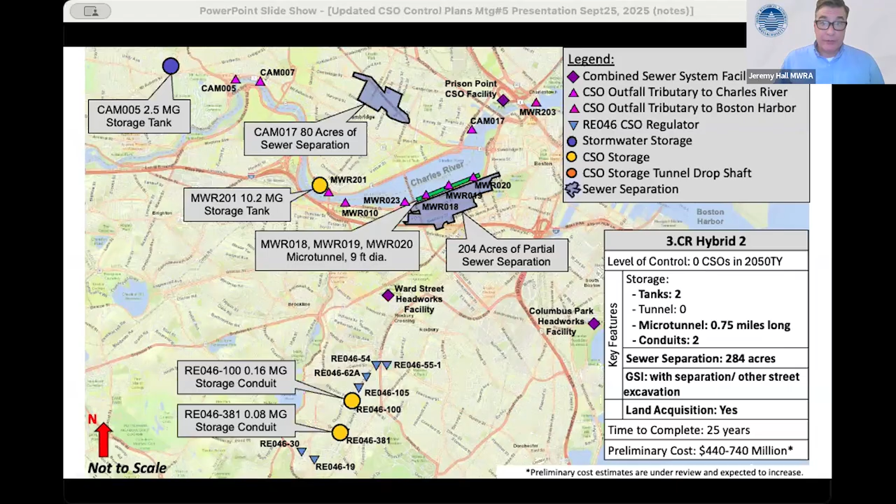And a 9-foot diameter micro tunnel along the Charles River Esplanade to store the flow from 18, 19, and 20. The partial sewer separation allows stormwater from smaller events to continue to be conveyed to Deer Island, which takes most of the storms in the typical year, and the all-important first flush, capturing the phosphorus and other pollutants associated with that first flush of stormwater.

Moving on to hybrid number 3, it's the same as hybrid 2, but includes additional sewer separation areas, bringing the total areas of sewer separation to 446 acres.

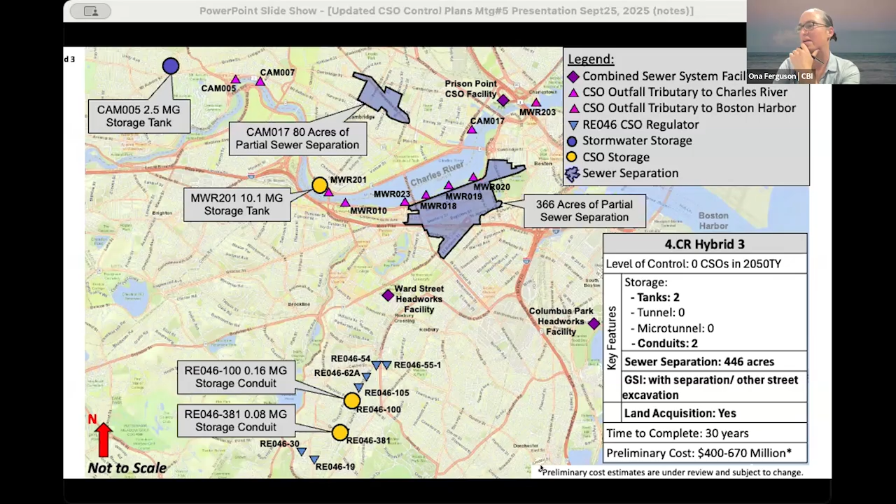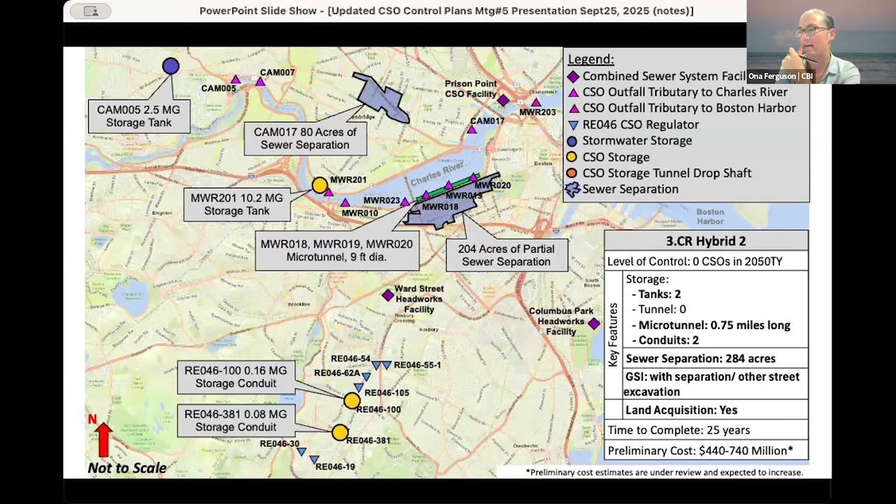And Jeremy, to interrupt, am I on the wrong one then? Let me go back. Didn't we, I think we just did 3. Is that right? We just did that one. Yeah, we should be on 4. Okay, oh, I see, Charles River Hybrid 3, which is number 4. Sorry, thanks. That's okay. All right, so just to go back, this is similar to the other hybrid, but it is solely based on sewer separation, which reduces the need for the microtunnel.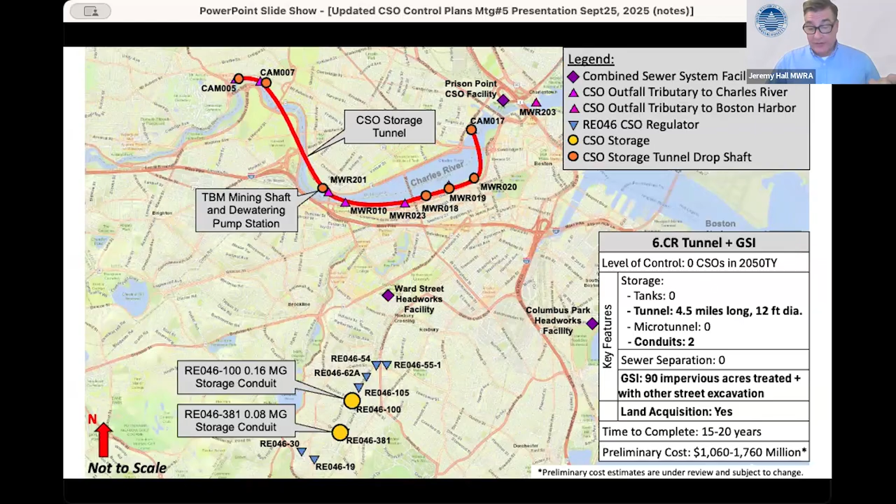So this is the same alternative plus GSI. The GSI reduces the amount of stormwater entering the tunnel. However, it does not decrease the diameter or the length of the tunnel. The time to construct is the same as the previous, at about 15 to 20 years, and with the additional GSI component, the cost has increased as well.

So now, the others have already described that we did look at sewer separations for 0 CSOs in a 2050 typical year. In order for this region to meet that requirement for the Charles, we would have to do 4,400 acres of separation, and associated with that would be an increased phosphorus load by 2,500 pounds.

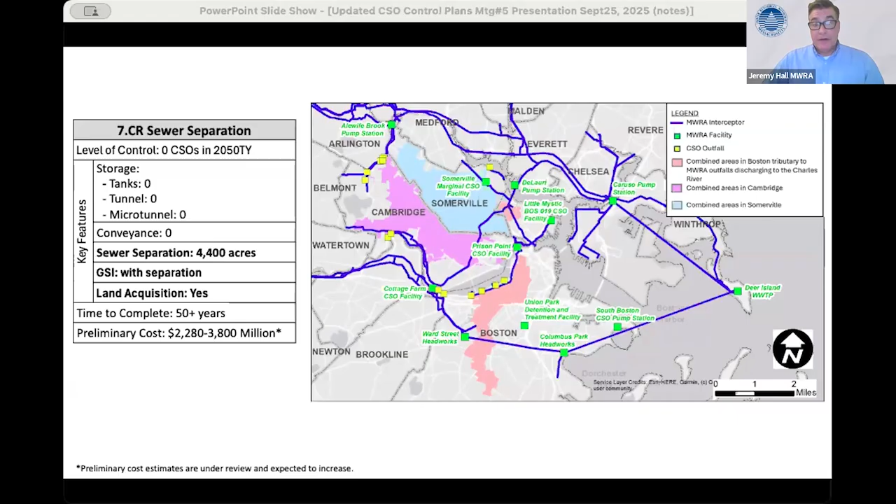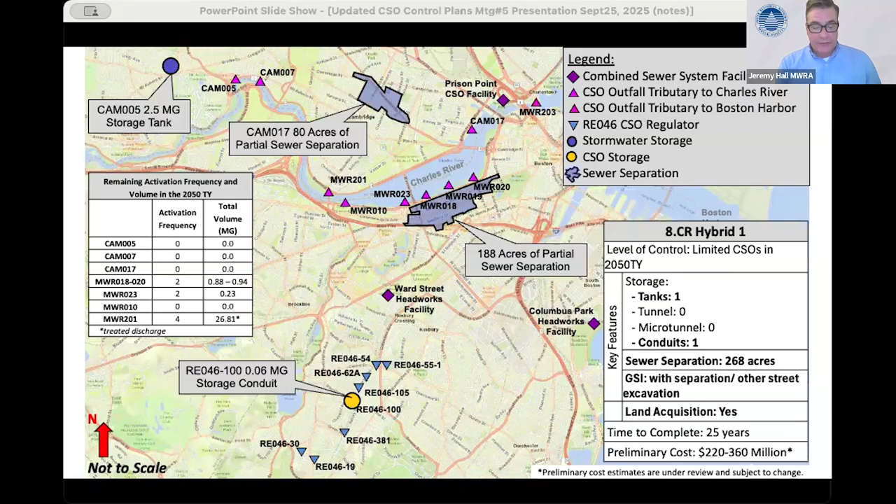There would be an additional cost and challenges to try and remove that phosphorus once the system has been separated. As mentioned on the first table for the Charles River, we have a few limited levels of control, and we call this one 8CR Hybrid 1. This one includes a 2.5 million gallon storage tank at CAM005, top left of the screen, which is the same level of control as in the other project. We also have 80 acres of sewer separation at CAM017, which you've seen at another project, but this alternative also includes 188 acres of partial sewer separation, which picks up MWRA 18, 19, and 20, and a small storage conduit down at RE046-100.

Based on the typical year, we would still have a small discharge out at 18, 19, and 20, and at MWR023, as indicated in the table. Cottage Farm will also continue to have discharges, but it is predicted to discharge 4 times in the 2050 typical year and is treated. This alternative reduces the activation and frequency from the baseline, with the majority of the remaining flow to be treated at Cottage Farm. The time to construct would be about 25 years, at an estimated cost of between $220 to $360 million.

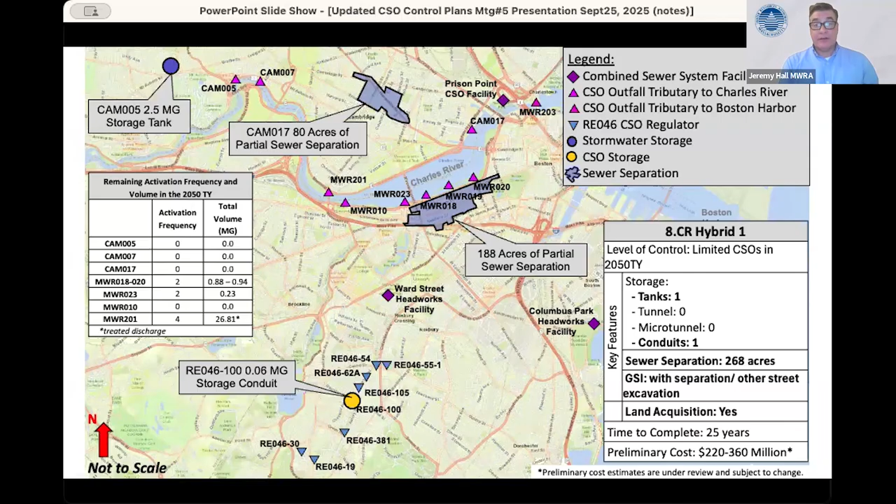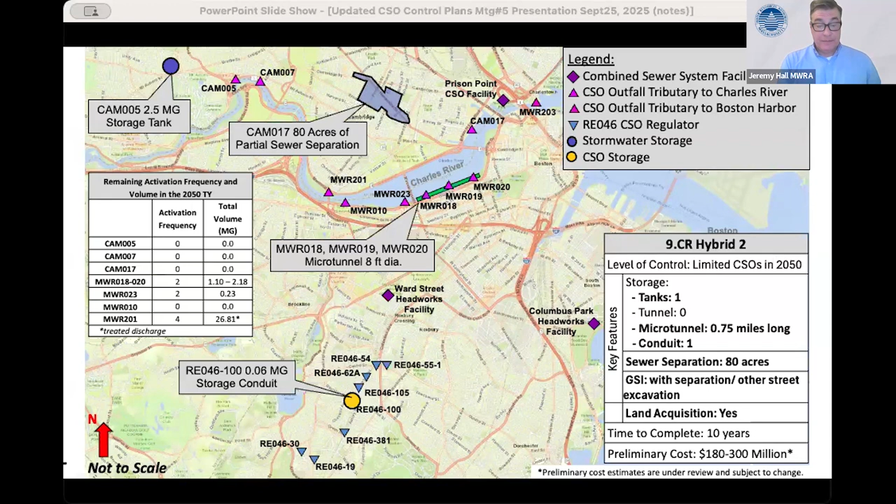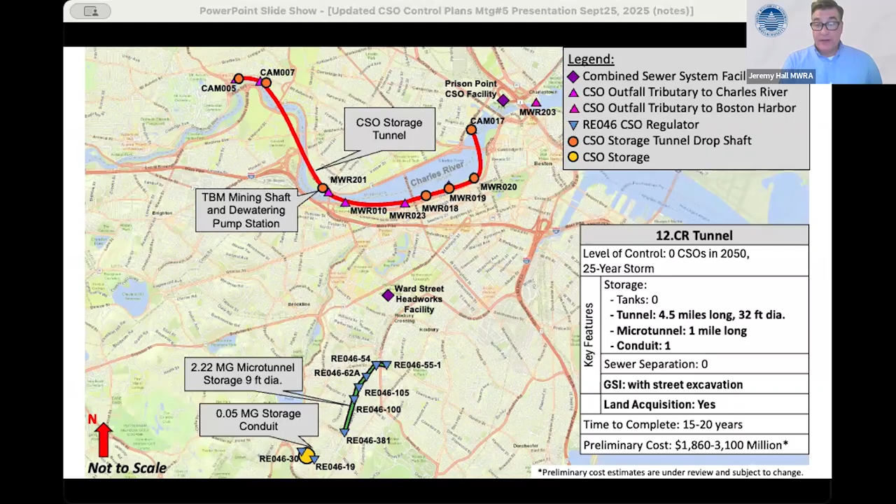CR number 12 is another tunnel. This tunnel has been designed to capture 0 overflows in the 25-year storm. The key components are a 32-foot diameter tunnel that is 4.5 miles long. This alternative would also utilize a 1 mile long, 9-foot diameter micro tunnel and storage, and GSI would be included with any of the components with any street excavation. This project is estimated to take between 15 and 20 years at an estimated cost of $1.8 to $3.1 billion.

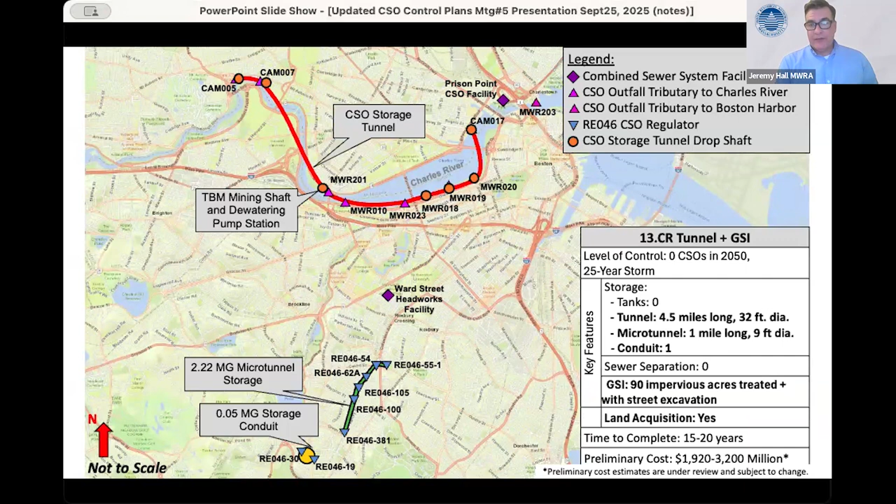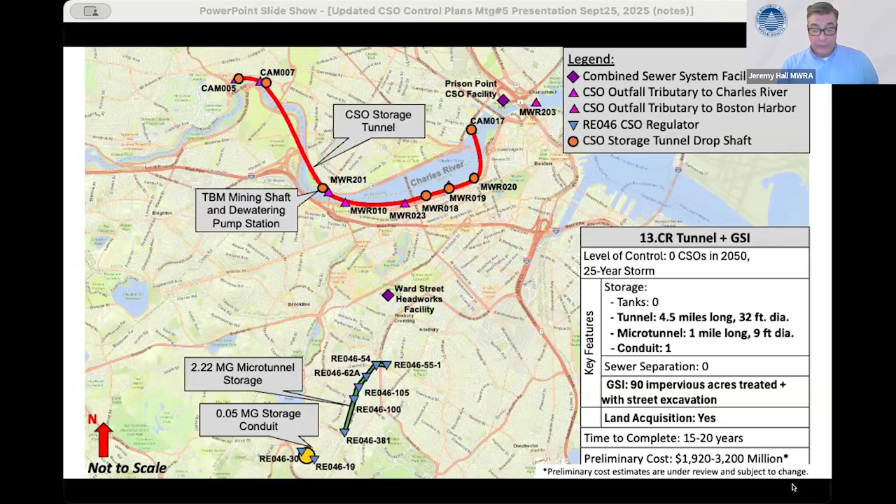Moving on to 13, this is essentially the same project plus GSI. As others have mentioned earlier, GSI, when we looked at this example, didn't change the diameter of the tunnel, but it is an evaluation we did to investigate the validity of doing GSI. The time to complete this project would be 15 to 20 years at a cost of $1.9 to $3.2 billion. I believe I'm going to hand it over to Chika, who's going to go over the initial observations for the draft updated CSO control plan.

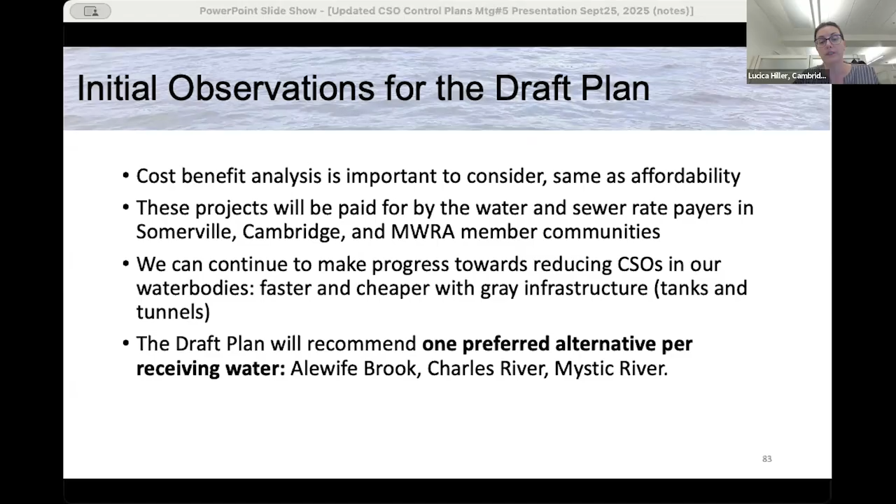And again, a reminder that the draft plan will recommend one preferred alternative per receiving water: one for the Alewife, one for the Charles, and one for the Mystic River.

I'm passing it on to Brian to go into more detail about what to expect in the next 13 months.

Thank you, Lucica. All right, so the project partners here, Cambridge, Somerville, MWRA, made some great progress in developing and coming up with this whole list of alternatives under consideration and presented tonight.

The draft plan will include all these CSO alternatives that we've described tonight, as well as other alternatives that we evaluated and didn't feel it was appropriate to carry forward in this analysis. Bottom line, we thought of a lot of things, and all that stuff will be documented in the draft report that you'll be able to review in December.

Along with DEP and EPA, the draft plan will be available for your review by the end of the year. We'll then organize another public meeting, number 6, where we'll present the draft report along with our alternative selection process and solicit initial comments from DEP and you, the interested stakeholders.

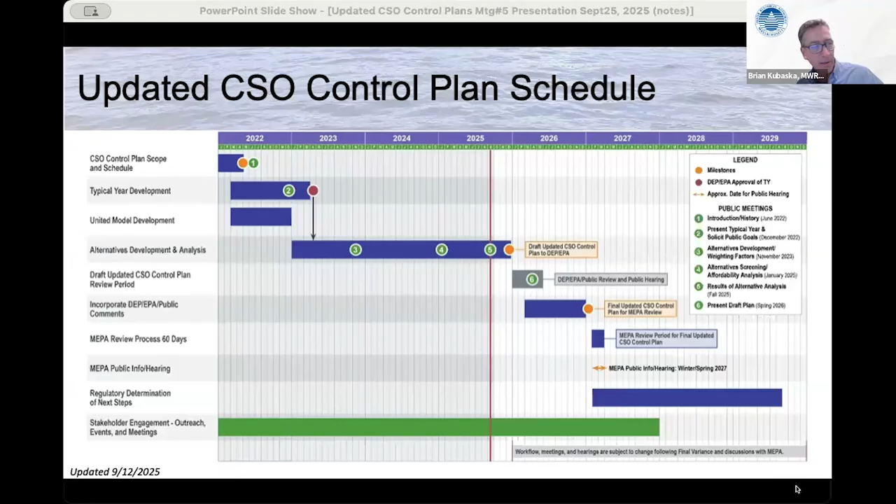Next slide. So this kind of says a similar thing in a different format, but I think it's helpful to just block it out in the 3 years remaining. So this 2025, we've got a lot of work to do here. We're coming to the finish line.

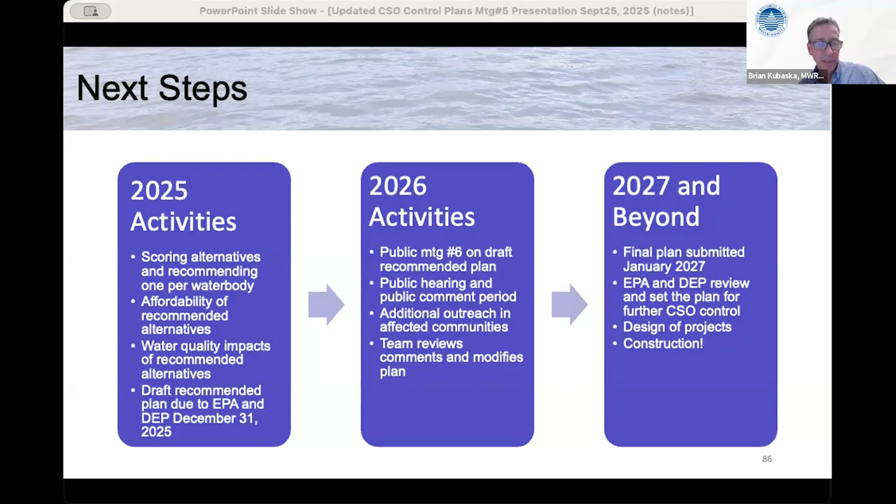We are in the process of finalizing some scoring based on those criteria Rich was talking about. We're working on affordability of the recommended alternatives. EPA has guidance on affordability in determining what is affordable, so we're using that guideline to develop those evaluations.

We're finalizing some water quality impact information, and moving forward to develop that draft plan in 2026 — public meetings, hearings, additional outreach. We will be doing some additional meetings in the region to make sure that others are aware of this, contacting potential abutters and such to make sure that they are aware of some of the proposals that we're considering.

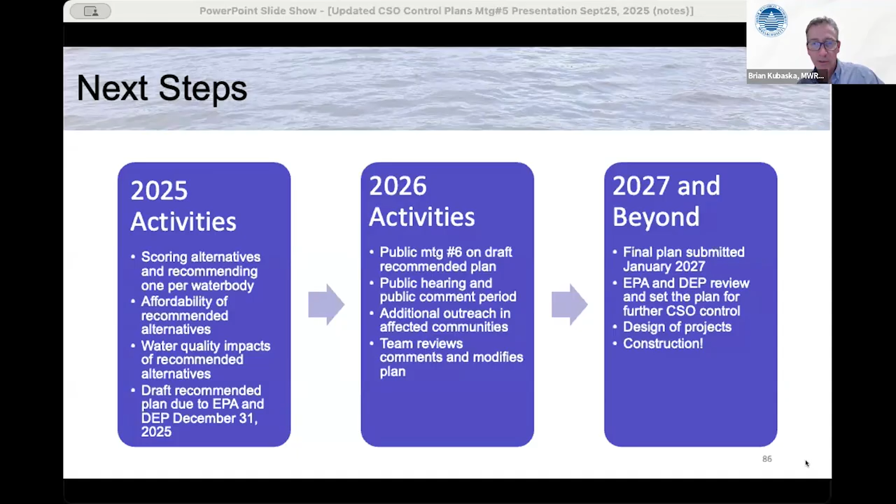And the team's going to review comments received from yourselves, DEP, EPA, and we'll address those in the final plan, which will be submitted in the beginning of January. So we'll go through that MEPA review, DEP, EPA, provide some additional comments, and then we're off designing projects and hopefully moving to construction. So that's the general timeline of next few years.